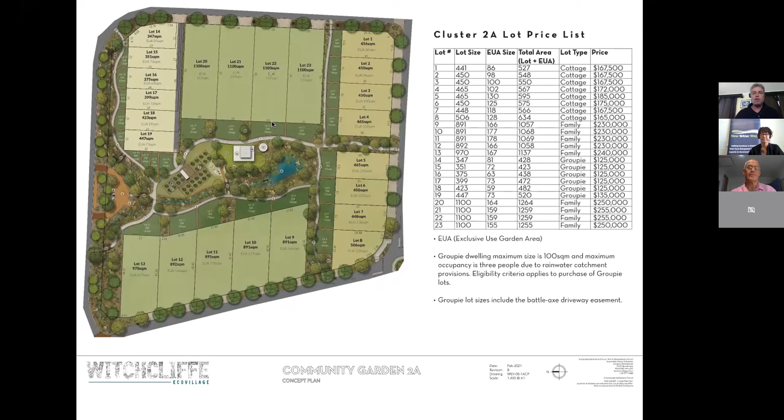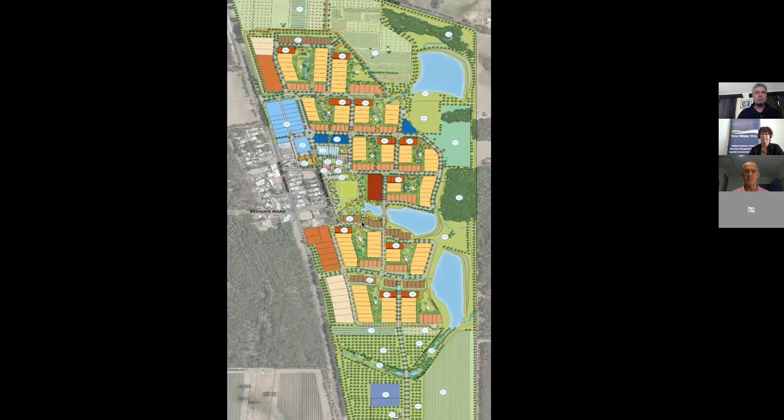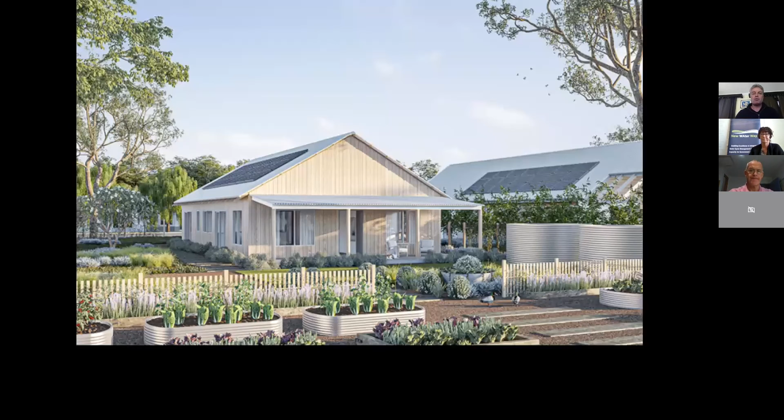Our built form is, this is just a bit of a representation of the village centre, and it's quite exciting that a lot of the landscaping is all in now, and the buildings are not far away from starting. The built form is a key part of achieving our sustainability outcomes, and there's strong controls in place to ensure sustainability, amenity and aesthetic outcomes. I'm not going to go into detail on this because the focus today is water, but I will say that passive solar design principles are enshrined in our design guidelines, and they've been developed using life cycle assessment modelling to make sure we're achieving the most sustainable outcome over the full lifespan of the buildings.

As well as us testing our various options to develop our design guidelines with life cycle assessment, each building is also subject to a life cycle assessment to make sure we're achieving the project goals of carbon negative buildings. And they're assessed by the developer before going to the Shire for planning and building approvals. And if you'd like more information on the design guidelines, we want to make a lot of our information and work public to help other people improve their developments, and so those guidelines are available on our website.

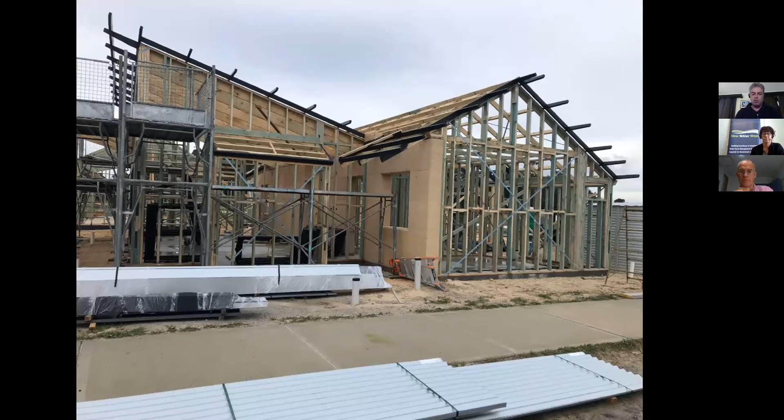Some of the buildings taking shape. We've got a really interesting mix of materials. A lot of timber, because timber actually captures and embodies carbon in the building fabric. We've also got rammed earth, we've got hemp buildings, we've got straw bale buildings.

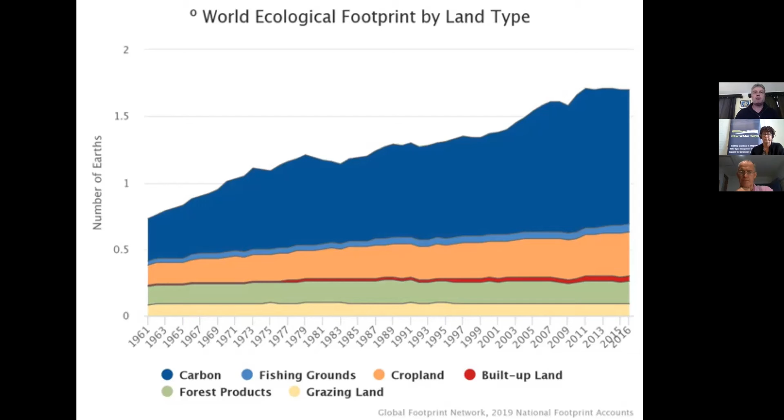So energy, a large part of our national ecological footprint, as I said before, comes from energy use, and it's an obvious area which we need to focus on. So we've started with the energy efficient building design, but each home also has rooftop solar, and each cluster has a microgrid that connects every house in the cluster, and each microgrid has an energy management system, a 232 kilowatt Tesla battery, fast electric car charging, and that battery allows us to have a very high current to enable that supercharging to take place.

We have 3-phase to all of our houses, so there's faster vehicle charging at the house, and each cluster has a grid connection, so they've got backup power in the event of issues, but probably more importantly, so we can feed our surplus solar power back into the grid. And by having such a big battery capacity, that feed-in can happen at the best time of the day and really maximise the economic benefit to our residents, but also help Western Power. The battery storage really helps them stabilise their grid at the end of a long supply line. And our lighting for the pedestrian network also comes off the microgrid.

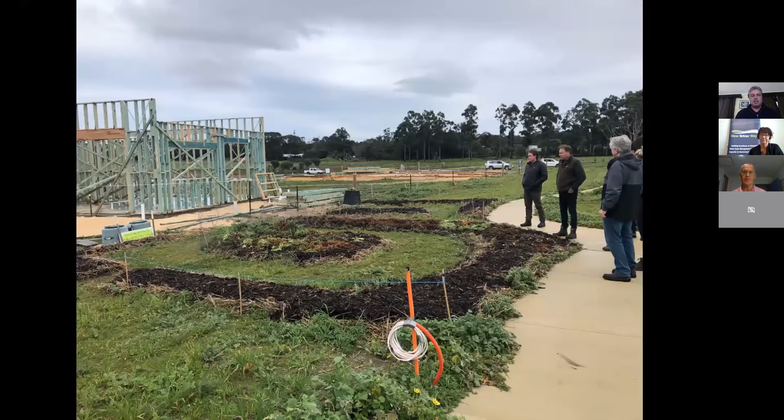And each household has their own herb and veggie garden, 200 square metres per person, and this is one of our first residents, already before the house is built, planting the veggie garden. And the veggie gardens are irrigated from our dams, which I'll talk about later. So every veggie garden is irrigated, and they're located in the community garden.

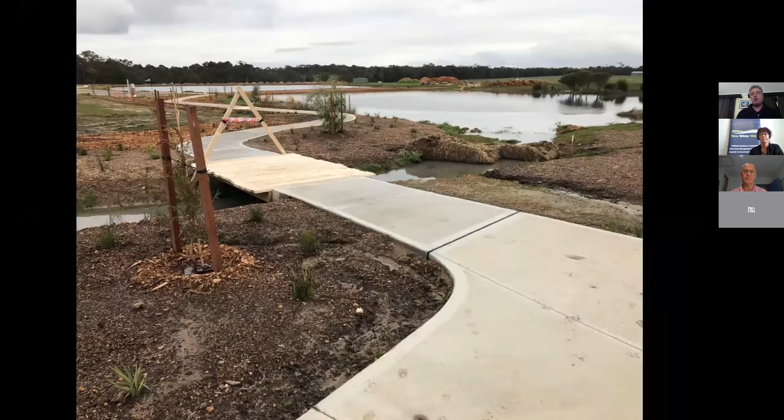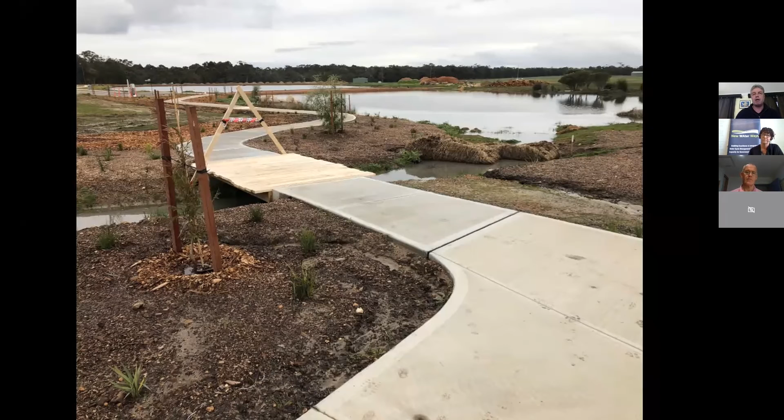Just to mention transport. So our roads were a bit restricted with the planning rules. We had to follow conventional subdivision practice. Things like fire trucks and rubbish trucks tend to dictate transport. We did keep our roads as narrow and as tight as possible to minimise speeds within those restrictions. But our focus to make the village more suitable for pedestrians is a very high quality, off-road path experience. We've taken all of our paths off the roads through the village gardens. And there's a maximum distance of about 500 metres from your front door through the community garden to the village centre.

We've got recreational trails around the dams through the bush regeneration areas. And we're also planning for electric vehicles. So we're starting to see electric vehicles being sold in greater numbers. It's interesting to note that in Australia, Tesla Model 3s last month actually exceeded the number of Toyota Camrys being sold. So it is starting to happen, despite some resistance in the market. It really is starting to happen. And so we've got 3-phase to every dwelling, and we've got superchargers for high-speed charging in every cluster.

A lot of people ask about the governance, because the governance has been something that is quite challenging. How do you do something different where you've got shared ownership and management of things that perhaps the local government doesn't want to get involved in? So each cluster is a survey strata lot, and the community garden is owned as common property. So the Strata Act provides a legal structure and framework, and through the bylaws, management and controls for the community garden, management of the infrastructure, and funding mechanisms to ensure they're sustainable financially into the future.

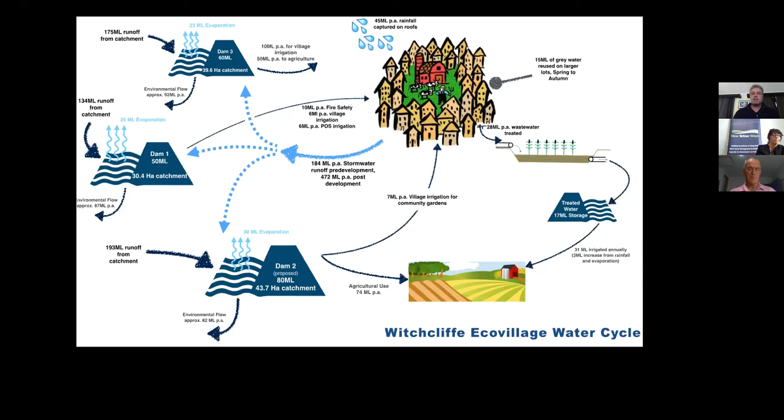So we've created a set of guidelines that are a lot more sophisticated and a lot less conservative than the Shire's usual flat requirement of 160 kilolitres minimum storage on a rural property. And we published these as part of a residential water guide, and that's available on our website if anybody wants to have a closer look.

So our minimum water consumption that we require is 100 litres per person per day, but you might want to provide a little bit more than that. And 100 litres per person per day equates to about 20 to 30 kilolitres of storage per person, depending upon what roof area is feeding those tanks.

And we've got the Bureau of Meteorology weather station that is actually located on our farm, and so we've been able to take about 15 years of half-hour, very fine timescale data and do detailed modelling to see how that performed with real-world data of what had occurred in the past.

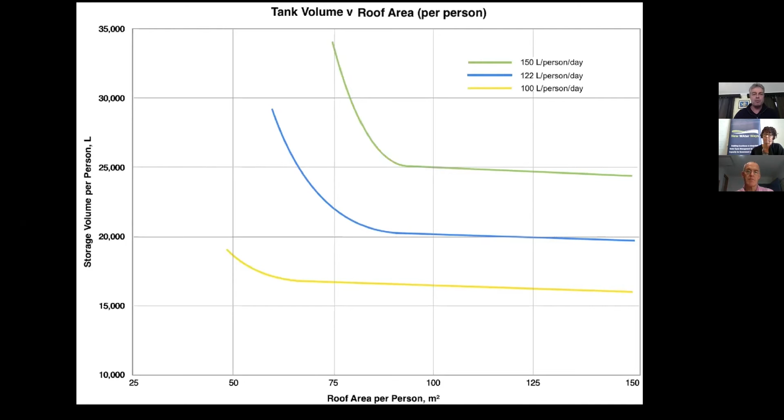And there's some tanks going in. The tanks are all on the roadside, so when you drive around, you're really going to see those tanks. And it's really set up so that the pedestrian interface is on the community garden side.

So moving on to stormwater. Our stormwater has been designed around open systems as much as possible. We wanted to mimic natural systems, and we wanted to make stormwater a strong landscape feature.

Some of the observations in analysing our stormwater system are that when you move to an open swale system, there's inherently a large vegetated surface area that fulfills our stormwater treatment objectives very easily, and it easily meets Department of Water stormwater treatment requirements.

The system's also inherently very resilient because small increases in the depth of the water in a swale provide large increases in flow. And our swales, to satisfy our own requirement to make things safe and accessible, and also the Shire's requirements, typically have batters of 1 in 4 sides. There are some steeper areas just due to topography requirements, but they're generally fairly gentle swales.

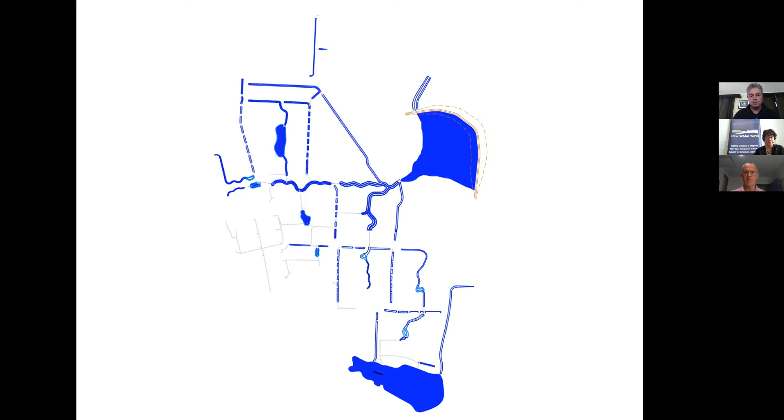And there's a typical example of the swales. The landscaping is still being established. You can see we put some rocks in. This one we're just starting to get those plants in. And this is a more village centre type swale where the level of landscaping is a lot higher.

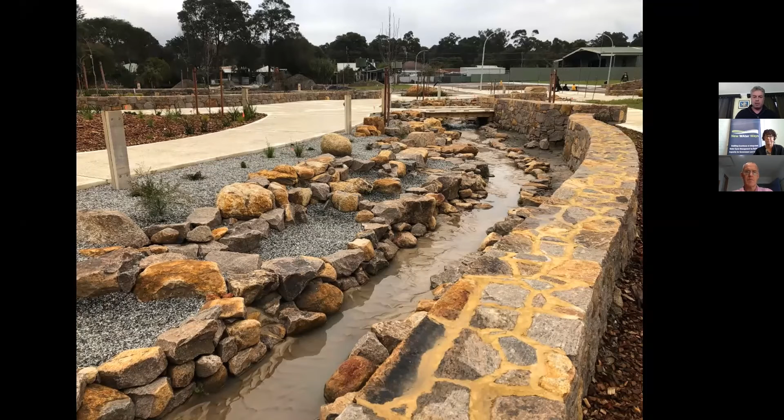So there's a lot of distributed storage, but the flows need to be slowed down. So how do we slow them down? This is a typical roadside swale. You can see the plants. This is after some heavy rain, so it really highlights how they're working. Stormwater basin, sorry. I just want to go back to this.

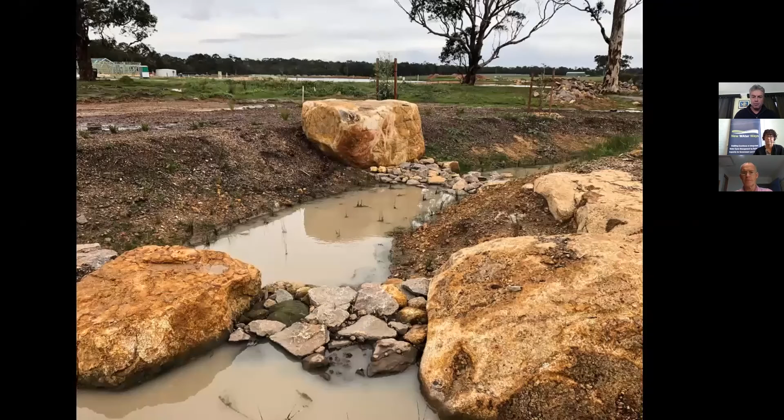So in order that the water doesn't just flow straight down the swales and increase peak flows at the end of the system, we've put a lot of, I guess you'd say, chokes in the system. All of the driveways and path crossings give us a really good opportunity to have points where we can slow the flow down and hold it. The system works really well with blockages.

Because the swales are an overland flow path, they're the minor conveyance system as well as the major system. And they're also very effective, I think a lot more effective than subsoil drainage, at controlling groundwater levels. Subsoil drainage is great when you first put it in, but you never really know how well it performs longer term. Whereas a swale, you can always see them and easily maintain them.

So the biggest challenges, I think, are dealing with crossings, in particular driveway crossings. So we've built them up front, and we've built them to a high standard with stone walls, so that they're consistent and provide us a landscaping opportunity.

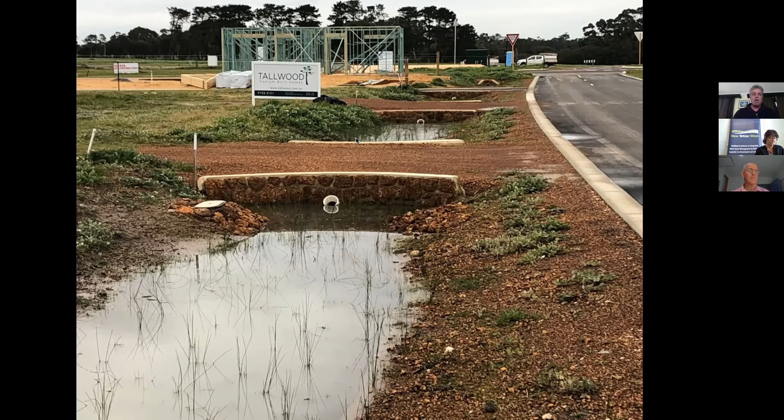For the implementation, there's an example where we've just put a little upturned end on the end of the pipe. We looked at all sorts of options to try and slow the water down, from little filters on the end of pipes, but at the end of the day, I think simplicity is required to minimise the long-term maintenance and make it resilient.

This one is really easy. The little upturned end helps keep the silt out of the pipe. It helps provide a bit of extra storage in the swale, and it makes it easier to poke a hose down there if it ever needs to be cleaned out.

I had some real issues initially with 150 millimetre pipes, because there's normally a minimum culvert size on a road of 300 mil, I think, in most local governments, and we really needed the smaller pipes to achieve that short-term storage. If we put in big pipes, we would have lost those opportunities for keeping water stored effectively throughout the catchment.

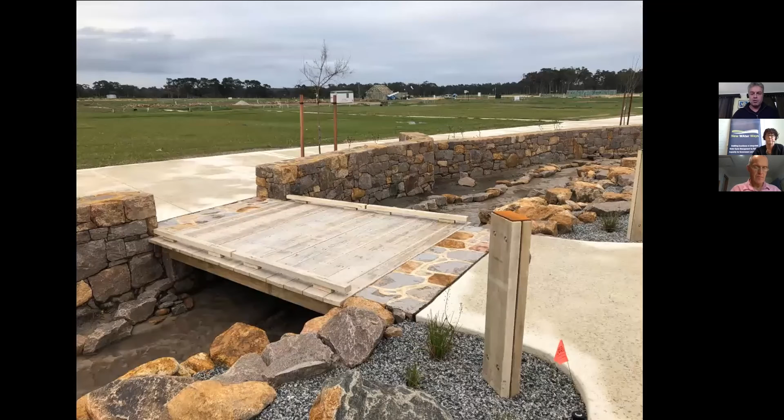There's a path crossing. We could probably have done these more economically just using a culvert, but we used it as a landscaping opportunity to really highlight the swale and the crossings of the stormwater system. Before I go into this one, I just want to go back to this.

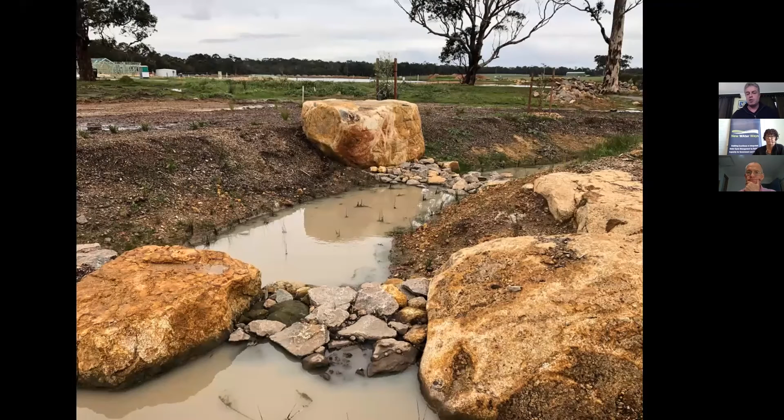It shows we do have a bit of grade in areas across the site. Some parts of the site are quite flat, but some parts have a bit of topography, and so to manage the erosion, we put in a series of riffles, and the riffles are also really effective in trapping the sediment and slowing the water flow down, creating little pools in the swales to create habitat.

And again, this is not long after some heavy rain. There has been a lot of earthworks done on the site, so you can see turbidity in the water, and as the vegetation starts to get established, you won't see any turbidity. But the system's working. It's dropping all of it out. I guess one thing about an open swale system, it's not set and forget like a concrete pipe system.

It does need a lot more effort to get it established initially, so there does need to be a bit more initial commitment from the developer. It's not expensive, it's not difficult, but just need to be aware that it takes a season or so to get established, and a bit of management of erosion and sediment while the vegetation gets established.

There's also an interesting question of where the system starts and stops and who's responsible. In a pipe system, the civil works are clearly defined. In this case, we also had a minor swale system. The ones I've been taking photos of are our major swales, but we've also got minor swales just to keep our garden areas drained. They're actually very small, something you could easily dig out and maintain with a shovel or a spade. And that's something the community will be more involved in maintaining.

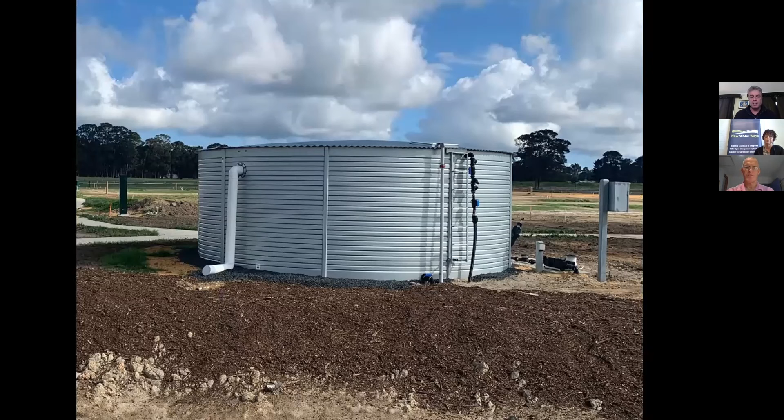And here's an example of the tank that's in the cluster. We've also got a similar tank in the village centre for the Shire. So we meter the water coming into the tanks. And then each cluster is responsible to pump their own water from their irrigation tank. And that allows a really good way of controlling how much water everybody's got. They can't just pump unlimited water from the dam. They can only pump as much as we've set the tanks to refill.

So moving on to sewage. We've established a new water utility under the Water Services Act, which is licensed by the Economic Regulation Authority to operate the village sewage system. There's only a handful of water utilities licensed for sewage around the state other than the Water Corp, many of them being mining companies for mining villages. So we're one of the few independent water utilities for land development.

And unfortunately, there was one at Lancelin, which recently failed due to lack of land sales, not really the fault of the actual scheme itself. It just didn't have the land sales to back it up. And so that is now being taken over by the Water Corporation, I understand.

And so it's really important that we make a success of this to prove the feasibility of decentralised sewage systems in Western Australia and to provide an alternative to the Water Corporation model of large centralised sewage systems that have massive pumping costs, huge infrastructure costs, and importantly in the southwest, they present a really large barrier to communities for treated water reuse. They present a really large barrier to getting new developments off the ground.

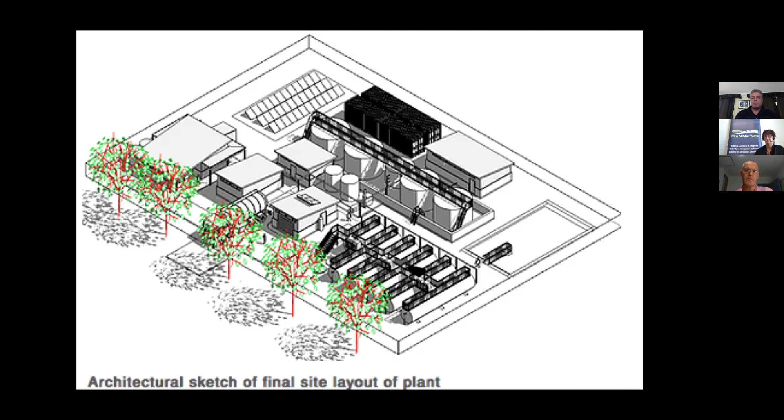The catchments are quite small by Water Corp standards, so the pump stations are quite small, and they pump via a common pressure main to a treatment plant down south of the site. And so this is our treatment plant now under construction. It's a moving bed bioreactor, MBBR plant, and the first MBBR unit is this unit here.

And that's basically a tank which is full of plastic pieces, a bit like spaghetti dinosaurs, and air bubbles up through the plastic spaghetti inside the tank. And the reason that it's really efficient in terms of energy, it's got a very large surface area on all that media inside the tank, and that allows the microbes a large surface area to grow on.

So the treatment plant is built from off-the-shelf components, so technically it's pretty straightforward. It's got an automatic screening unit in this building here, and that's really important also in minimising the plant energy usage, because by screening out with an efficient screen a lot of the organic loading, you don't need as much energy in the MBBR units.

In this over here, we've got a sludge dewatering and drying system, which is specifically developed for small municipal plants. And then the third building over here is a lab. So our operator, TMC Witchcliffe, is going to set up a lab on site so they can do a lot of their own analytical work. Here we've got storage for inflow, storage for outflow.

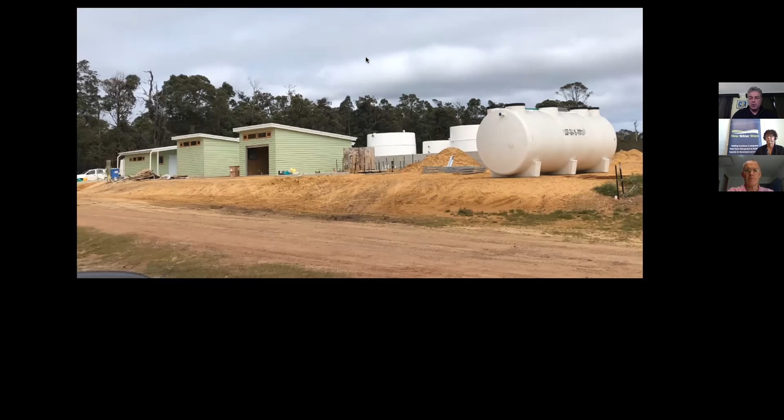Other than that, all pretty simple and standard technically, but the biggest challenges have been with the approvals system. So here's another view of the plant. This is a stormwater basin. You've got to have stormwater separation. Got bunding around these tanks in case the tank bursts. There's a lot of redundancy in the plant.

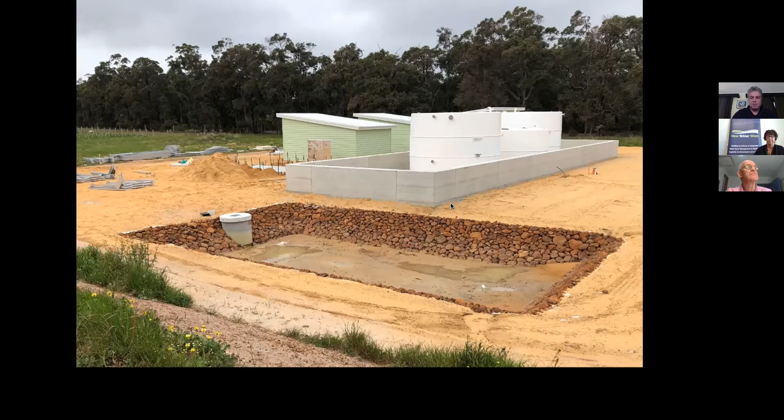And after it's treated, we've got a 30 megalitre plastic lined storage, which is enough to store the entire treated water over the wet season, plus the rainfall that falls on it. You can sort of see the water that's in there is just rainfall at this point. And then that's irrigated out on the avocado and eucalypt woodlot over the drier periods of the year.

So the approval process, we've got an operating licence from the ERA. We've got approval to construct wastewater apparatus from the health department. It's not actually approved to operate yet. You have to actually commission it with live sewage. So until we've got enough houses producing live sewage, we can't commission it. So yes, you need to take a little bit of a leap of faith, but you're going to be able to get that through, no problems.

It's registered under the EPA Act. It sits below a fully licensed EPA plant, but it is a registered plant, and we do have EPA conditions, and the conditions relate not so much to the sewage treatment itself, but to the treated water irrigation. And we've got approvals from the Shire and approvals from the Department of Planning.

So 5 different government agencies were involved in the approval process, and there were times that it was quite frustrating because agencies wanted to see the other agencies' approvals first before they would give their approvals. But we eventually found a way where we could get through that and got things in place.

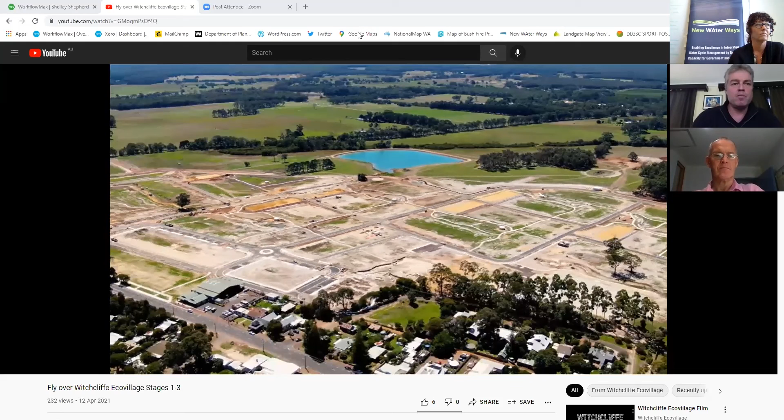Our landscaping is well underway. Our re-veg planting of the stormwater systems in our first stages is complete. The oval has been fully turfed and is getting well established. In our village green, all the landscaping has been put in and is looking fantastic. Our street tree planting is underway in our main commercial areas, and at our entry all of our landscape trees and street trees are put in. We're still coming up to spring, and we've got a lot of edible landscaping in our residential streets, so that'll be getting underway now.

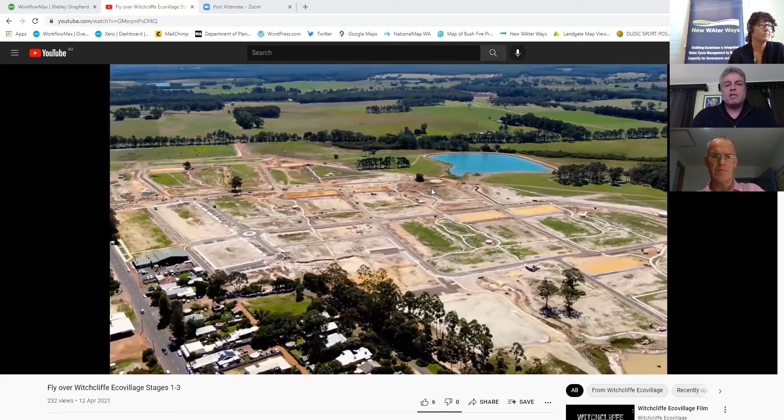Our stormwater system proved itself really well in the first winter, and our first winter is probably the most difficult, given we had a huge level of builder activity. We also had a very wet winter, and the first winter is where you have the biggest challenges with establishment, with sedimentation and erosion.

So the first stage of construction was the largest residential construction project the Shire has ever seen in the area. We used one of the larger civil contractors in the state, Wormall, and it was a pretty large project even at Perth scale for them. At one point, they had about 25 excavators on site trying to get the sewage and stormwater system in place. So naturally there have been challenges with an innovative project of this scale. But just to wrap up, I want to focus on a few of the challenges we've had from a water perspective.

Protecting the downstream dams when constructing a really large scale earthwork project in a catchment with clay and silt soils during winter is really difficult. We had stormwater diversions, hay bale filters on every pit, and a lot of hay bale filters along our waterways. And we still ended up with some turbidity in our dams. But fortunately, because our dams were so large and able to capture all that water, we didn't have anything going out downstream, affecting the natural waterways or the neighbours.